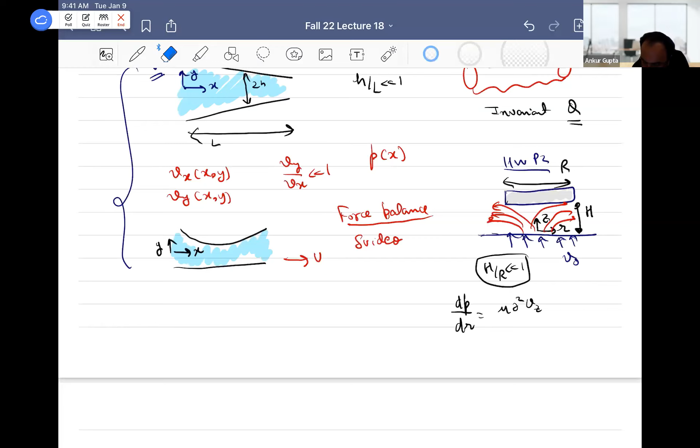the disc. But if there is gravity, how can I use any of the analysis? I have ignored gravity. When I write the formula, let me just write it here. dP by dr is equal to mu del square vr by del z square. Okay, so this is how I will start my lubrication, right?

I'll take the pressure gradient and argue it is only a function of radius. Then mu del square vr by del z square. So it's del z square in the bottom as well. And this is how I'll start. And I'm saying there is gravity because that's what is holding the weight of the disc. But there is no gravity here. Sorry, is it the dynamic pressure?

So the answer is there's a dynamic pressure. So that's a good comment. We haven't discussed dynamic pressure, so please go ahead. Well, we're solving these equations in the fluid, and in this case, the pressure just dominates gravity. Right. Good. Okay. So almost there. So that's exactly the idea.

Note that we argue pressure is in the radial direction, right? Implicit in that is that we have done a z direction balance. If gravity is only in the z direction, the effect of gravity is only going to be in the pressure in the z direction. And because we have already argued that the z dependence is small, we can ignore gravity in the radial direction because there is no gravity in the radial direction.

Now imagine if I flip the system, somehow there was gravity in the primary direction, then I will have to include gravity. It's not that gravity doesn't exist, it's just that in this problem, it is not affecting our pressure. If I flip the system somehow, like an air hockey table with a disc and the flow in this direction with gravity, the gravity is going to impact it. So I just want to clarify that so that you can understand.

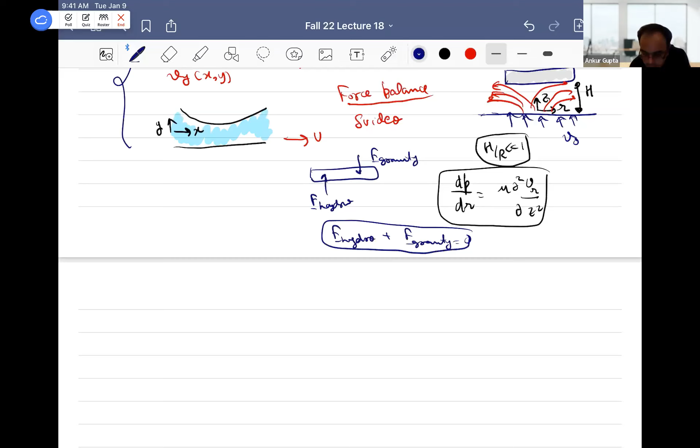So now let's go to the next kind of flow. For unidirectional flows, we learned invariants. And by the way, the invariant in this problem, as you will do in your homework, is naturally going to be V naught. We are basically pushing some air inside the system, so the invariant is not going to be flow rate, but V naught. All right. So first we discussed unidirectional flows. Now let's go to creeping flows.

So creeping flows, the idea was simple. The idea was Reynolds number is much smaller than 1, and hence my equations simply become ... plus rho g is equal to 0. And for practical purposes, we consider gravity-free flows. It can impact it, but we were just ignoring it, assuming systems with gravity equal to 0. But this is our equation. And naturally, we also have this equation. We just ignore the inertia completely because the Reynolds number is small.

And a hidden assumption, which will be true for this course, but just so that you are aware, is that the process time scale is comparable to the viscous time scale. Basically, the Strouhal number is on the order of 1. That's a detail, but just for completeness, I want to emphasize that there is a small assumption there. We'll not worry about that for the purpose of this course. Now, just to briefly recap what we discussed.

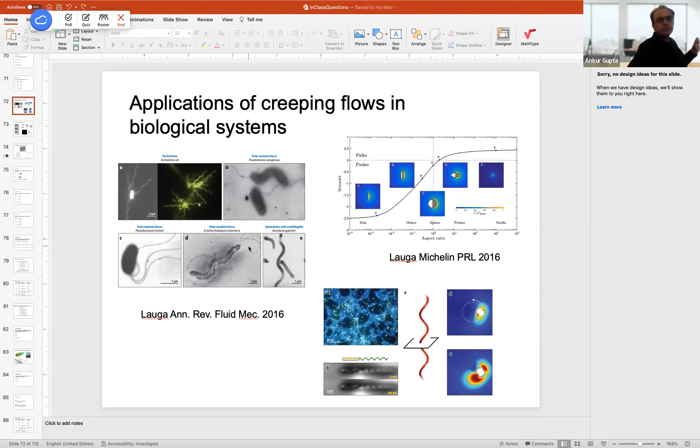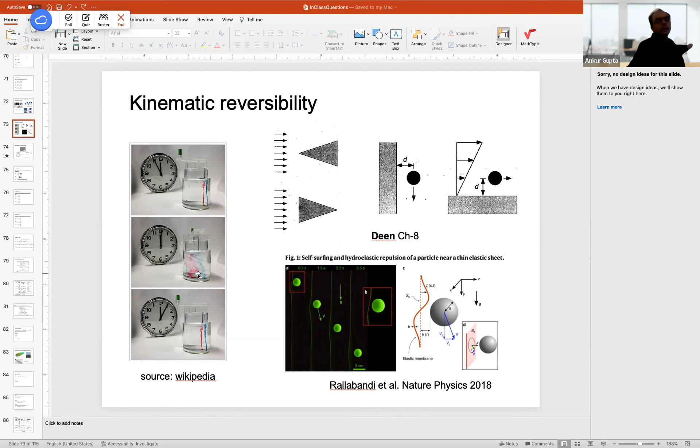The main point I want to emphasize is that these are time-dependent systems. This image that you see is time dependent, right? And my equation does not have any time dependence. So what does that mean? Isn't that weird? I'm talking about all these phenomena which are time dependent, but there is no time dependence in my equation. Yes? Is it because they're position dependent and time plays into position, which is why it's reversible in time? It's a good idea. I think you're almost there.

So Colin's comment is basically that the position has an impact on time. A more formal way to describe it is that the boundary conditions can be a function of time. So don't forget that boundary conditions can be a function of time. So here I want to go back to the problem discussed last week, which is a squeeze flow problem, where we are squeezing out flow between two plates.

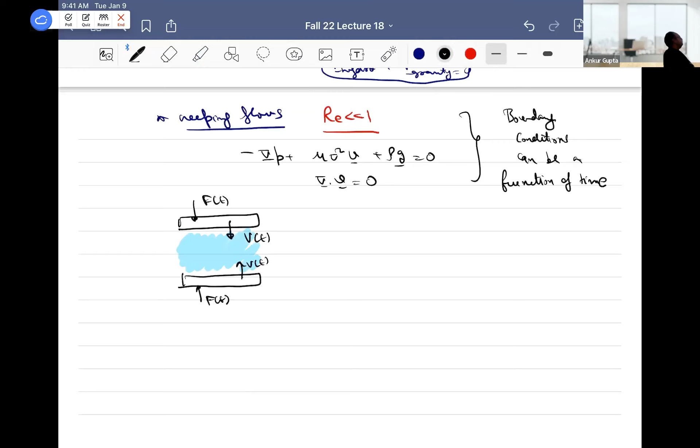So there is some sort of a V(t) here. And so you're applying some force here. And then you're trying to kind of push these plates. Actually, we'll just say V here, let's say. And then this height here, let me just call it 2h(t), just for purposes of this. Felipe did it with small h.

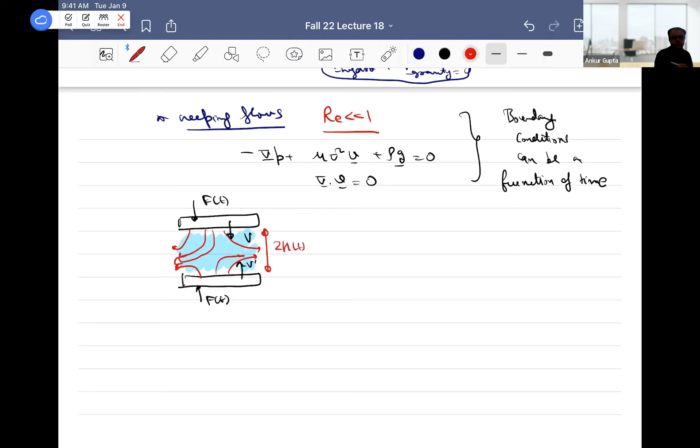And as Felipe had discussed, basically flow will happen kind of like this. You're squeezing out the flow. And the point being that this is R, this is h. We were given that h by R is smaller than 1. So in a way, this is sort of similar to the air hockey problem, right? There is some normal component of the velocity, from both directions. Height is very small compared to the radius.

So what is the difference? The difference is that now there is a time dependence. It's no longer a steady system, it's a time dependent system. So basically it is kind of like a lubrication problem, but with a time dependent boundary condition. And that's why we put it under creeping flows: this is a creeping flow where the boundary conditions can enter through time.

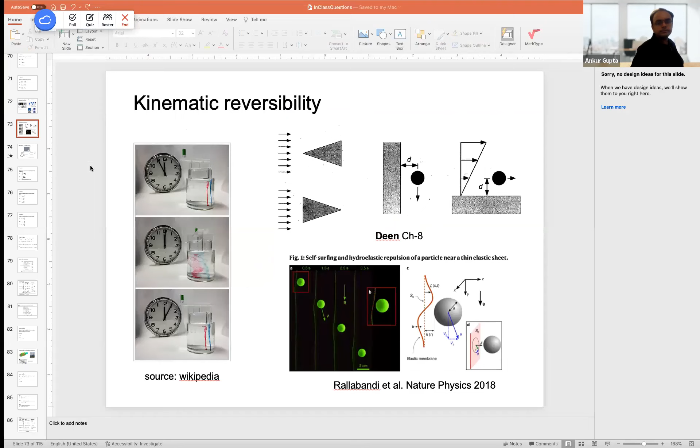We don't say that the system has to be necessarily steady, but when we formally describe lubrication, we assume that the system is steady. So here the system is not steady, it's kind of like pseudo steady. So let's do some quick clicker questions, because this will help you with your homework as well. I want you to think about what is the scale of the pressure here.

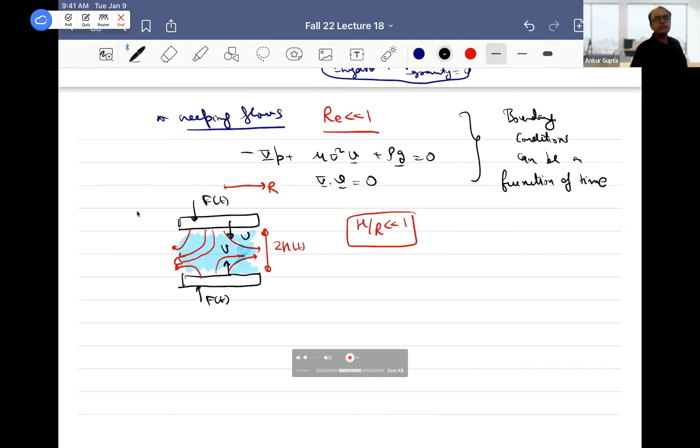And actually, let me correct one thing. Let's call this capital U, from both sides. So what do you think is the scale of the pressure? I just want you to think about the scale of the pressure, how will you estimate it, and what will happen to the pressure.

So I'll give another maybe 45 seconds. Take your time if you need a few more seconds. A hint for those of you thinking where to start is to write the boundary condition and write the governing equation, and once on the governing equation, apply an order of magnitude analysis.

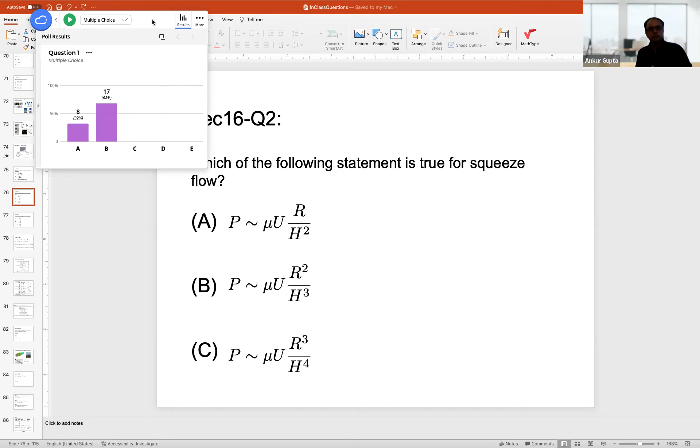All right, maybe last few seconds in case somebody wants to put in their answer. Great. I'll close the poll now. Let's look at the results. So there's a split. I do want you to talk to your neighbor to see what answers you put in, and till then I'll write the solution. Make sure to talk to your neighbors, and we'll start to discuss this.

All right. So the correct answer is B. Let's look at how it is B. Felipe did discuss this. I just want to emphasize again that from the continuity equation, we know V_R by R is U by H. Note that you have been given the normal component of the velocity. So V_R is UR by H. Then when you do scaling here, it's mu V_R by H squared. That's where most students make a mistake: they just substitute V_R as U instead of UR by H. So you get mu U R squared by H cubed.

And now, once you have the pressure, what do you think would be the force? So you've done the pressure scaling. What do you think will be the force? I'll give you about a minute or so. Let's poll this as well. What do you think will be the force for squeeze flow?

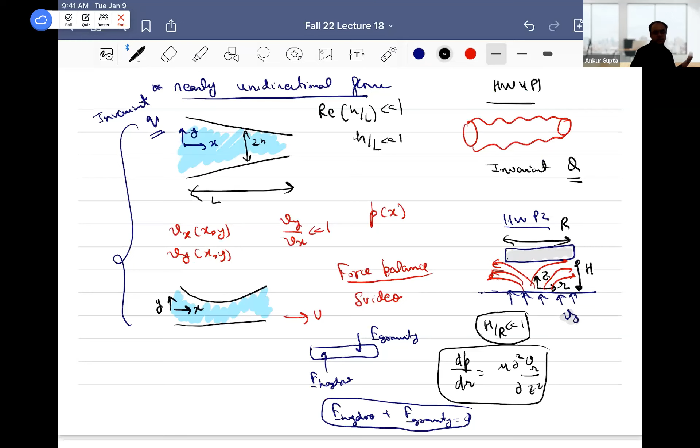Okay, so don't forget that stress vector times area still has to hold, and at the end of the day, you will see that it just ends up becoming pressure only in this problem. So in lubrication flow problems, in symmetric cases, that will happen. When will it not happen? Something like this here, because you're sliding in this direction. There is something that stays unless there is some symmetry. It generally ends up having both kinds of components. So just want to clarify.

Yes, please. So when you're doing the order of magnitude of force, in the end it's an integral of the stress vector, so you just ignore that? Yeah, I've definitely skipped that. Good question. The more correct way to do it is to actually take the normal vector. So it is actually S·n. It'll have two components in the normal direction. One would be tau zz, and the other would be pressure.

This is what you will get actually. And this is much smaller than pressure, which is what you have to show if you want to formally show the full system. But in lubrication flow, in the normal component, pressure generally always dominates, so you don't have to worry about it. Any other questions? Anything that's confusing?

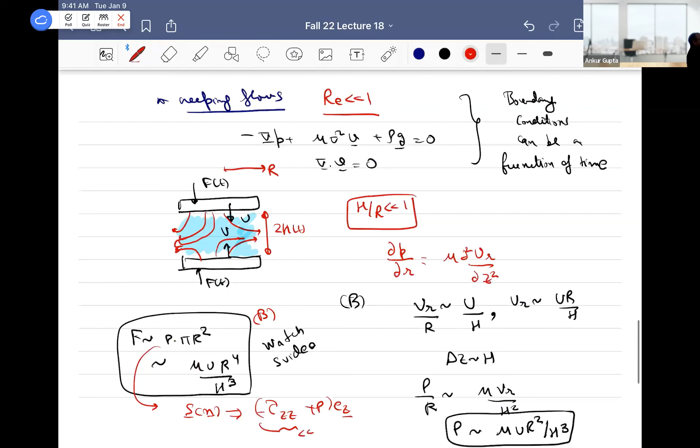All right, so until now we have discussed all the problems where either Vy was 0 or all other components but one were 0 and one was dominant, and then we added the complexity of a dominant flow with a time dependent system. So that's until now. And finally I wanted to discuss creeping flow with two components of velocity. And that's essentially the flow past a sphere.

So flow past a sphere like this. And we ignore the gravity. So ignore gravity in this problem. And then we'll say minus grad P plus mu del squared V is equal to 0. And then del dot V is equal to 0. Now V can have three components, VR, V theta, V phi. This is the sphere of radius R. U infinity e_z.

So this was the problem last time which was discussed, flow past a sphere, and the sphere is a rigid solid. In your homework 4, problem 4, you do a bubble, flow around a bubble, and I'll discuss that in a second. But now you had this, so we ignore V phi. We say there is no flow.

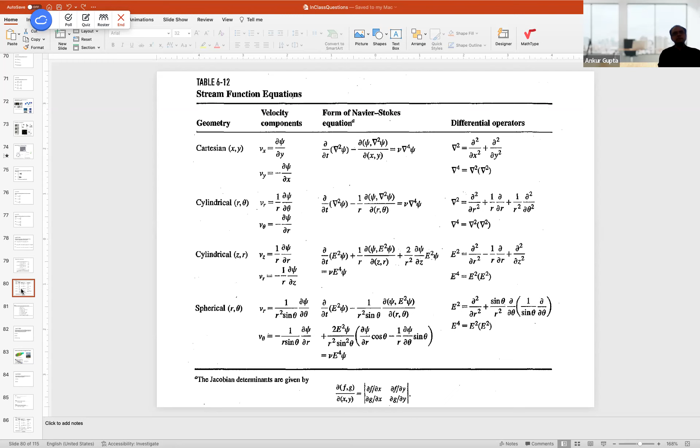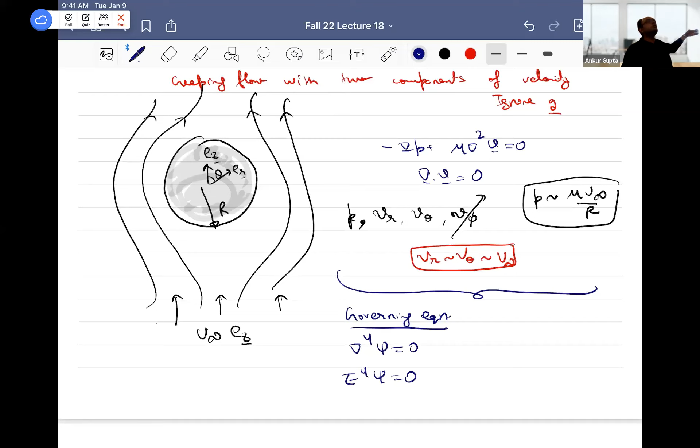But what are my boundary conditions? Are they in psi? Because the variable I'm trying to solve is psi. So how will I find my boundary conditions in the system? Any thoughts? It's a fluid-solid interface, so no slip, no penetration, and then you know the velocity far away. So the boundary conditions, though, are in VR and V theta. Does everybody agree with this?

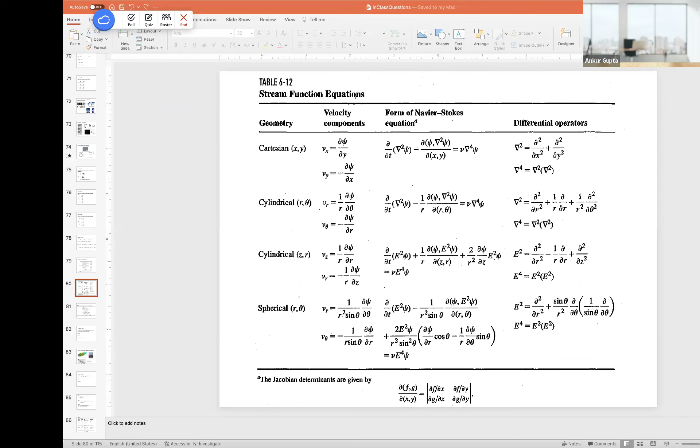Any questions about this? Any questions? So how do I go from VR and V theta to psi? Absolutely. So I really want to make sure that you all follow this process, is that we know the VR and V theta. If I write my boundary conditions in VR and V theta, then I can convert them into psi. Okay, convert them into psi. So you have basically governing equations and then boundary conditions, and you can convert them into psi.

Now, should I be able to just solve the system? I mean, you have governing equations and you have boundary conditions. Should I be able to just directly solve? What do you think is the complication here? Sorry? Yeah, I agree. But I'm saying that there is a fourth order governing equation, and you will have 4 boundary conditions. The complication is this is a PDE. It has dependence on both R and theta, right?

We know that psi is dependent on both R and theta. I cannot do any order of magnitude analysis to say that, oh, well, R is much more dominant, theta is less dominant, and so on. It is dependent on both R and theta. So that's why you convert psi of R comma theta, and I will skip over some of the details. Felipe had already provided this in his lectures, that you can actually argue that it'll become like an f of r times sine square theta, and this comes because of the boundary conditions.

Don't worry about this sort of detail. This will always be given to you in a homework problem or an exam problem, that you can substitute something like this. But I want to go through the process. So governing equations are this, boundary conditions are in VR and V theta. We convert the psi into f of r times sine square theta. Then now you convert both your governing equation and boundary condition into f of r. Okay, into f of r.

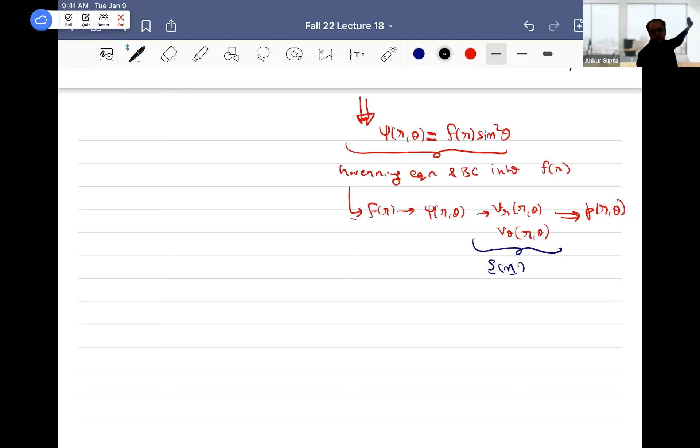Oh, by the way, there's also one last step which we don't do in the class, which is to get pressure of r comma theta. So something you will not do. We'll just give you the pressure, which is an even longer problem. So let's not go over there. But I want to show you the process. Remember this: creeping flow, 2 dimensions, stream function. That's the idea. Then boundary conditions, usual, but convert them into psi. Then convert a PDE into ODE.

Then solve for f of r, go to psi of r theta, VR, V theta, pressure of r theta, and then stress vector. And then from stress vector, you can calculate force. And that actually is the process to get the force as 6 pi mu r u infinity. That is the Stokes drag.

In your homework problem, you will do the exact same process. You will have VR, V theta, del four psi. The only difference being that your boundary condition will no longer be no slip. It will be 0 shear stress, because it's a liquid air interface. And the same process, you do the psi, you get f of r, you get VR, V theta, and then finally calculate F. So you do the same process, but for a different system and a boundary condition. So one boundary condition changes the entire flow calculation.

Okay. Now this result, this seemingly simple result, I would say has probably had the most impact on fluid mechanics, even other fields.

If you have ever used a DLS, dynamic light scattering experiment, you know that you can calculate diffusivity through that experiment, then you use the Stokes drag to calculate the size. It's called the Stokes-Einstein relationship, which basically is in every dynamic light scattering experiment. This relationship is basically used to understand drags of small particles.

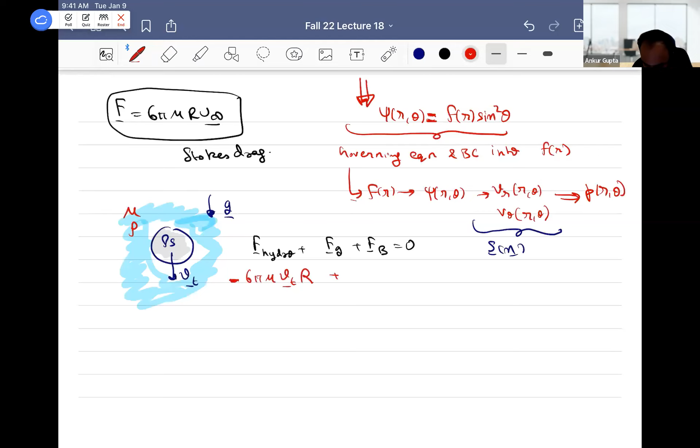So the net force is F hydrodynamic plus F gravity plus F buoyancy equal to 0, and we basically say minus 6 pi mu Vt r, and I will discuss why there's a minus sign, plus 4 pi by 3 rho s g r cube minus 4 pi by 3 rho g r cube equal to 0, and you will be able to derive that Vt is 2 by 9 (rho s minus rho). I believe this should be correct. Hopefully I didn't get anything wrong. And this is your terminal velocity calculation.

Okay, and I'll answer Noah's question. Noah had asked me a question, so I'll answer this question now. But this is essentially the calculation of that hydrodynamic force. First, there's a negative sign. Can anybody tell me why there's a negative sign instead of a positive? Yes. Because it's a force on the ball from the fluid rather than on the fluid from the object. So that is the force on the solid, right? That is also the force on the solid, the Stokes drag.

Right, because the force is when the fluid is moving. In this case, the fluid is at rest. It's the solid which is moving. So you just reverse the sign, because if you sit on the solid, then the velocity is minus Vt. Okay, does it make sense, Colin? It's the relative motion, because in this case the solid is moving and the fluid is at rest. So if I want to make the solid at rest, it's the fluid going in the opposite direction. So that's why there's a negative sign. Any questions? This is very important. Minus sign?

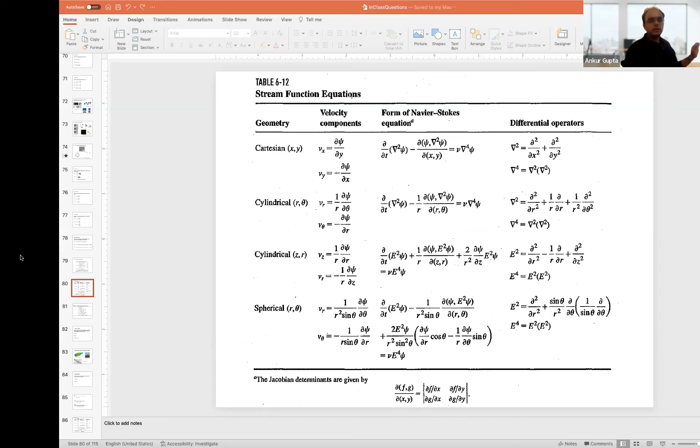One quick question before we take a break: since buoyancy force is the hydrostatic pressure force, aren't we double counting the buoyancy force? This was Noah's question. Since buoyancy force is a hydrostatic pressure force, right? We know that. And I have already done the full force calculation with the stress vector, where we include pressure. So aren't we double counting the buoyancy force?

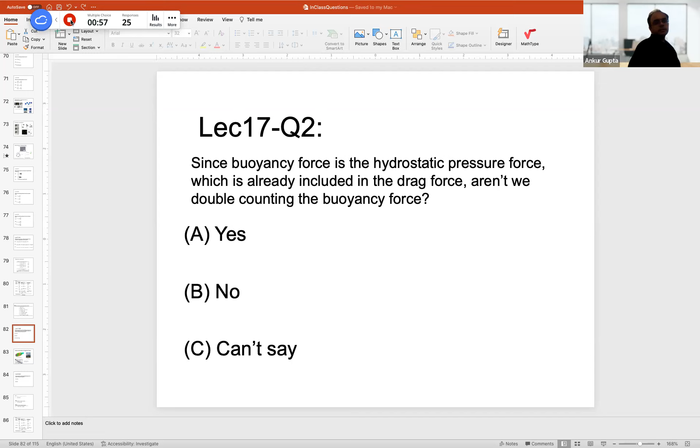Maybe another few seconds. All right. So let's end the question now and let's look at the answers. So most of you say no, which is correct. But I want to give a reason. So why do you think you're not double counting?

Okay, so a good sort of argument is that the drag force which you are calculating is sort of related to movement, and it's not really buoyancy. But then my argument is, well, pressure force is the buoyancy force and I'm including pressure. Then what's the issue here? Any thoughts? So that's where we cheated a little bit.

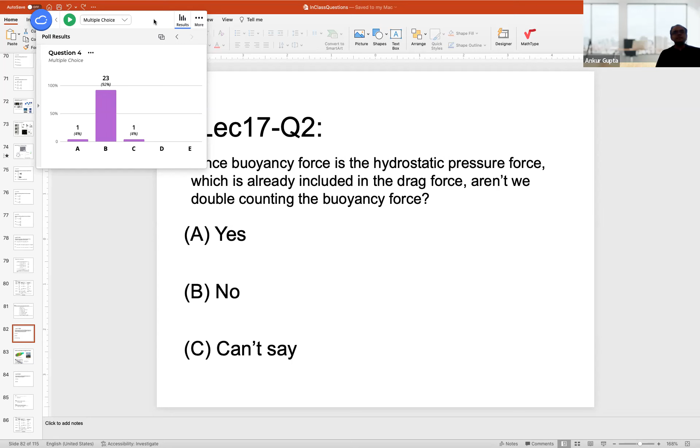So when I said here before that I will give you pressure here, right? We said this at this step. This pressure was calculated by assuming minus grad P plus mu del square V is equal to 0. If this pressure was calculated with a rho g vector, which should be the case, then you would get the buoyancy force automatically. But because creeping flow has superposition, we just know that it will have a buoyancy force

separately, and then we just use that as a drag force. So it's not double counting. It's just in this case, when we are calculating the pressure force, we did not include gravity. So that's why we can basically get away. Does it clarify? If we include gravity here, then you will not need to include buoyancy. It will automatically be included in your pressure forces.

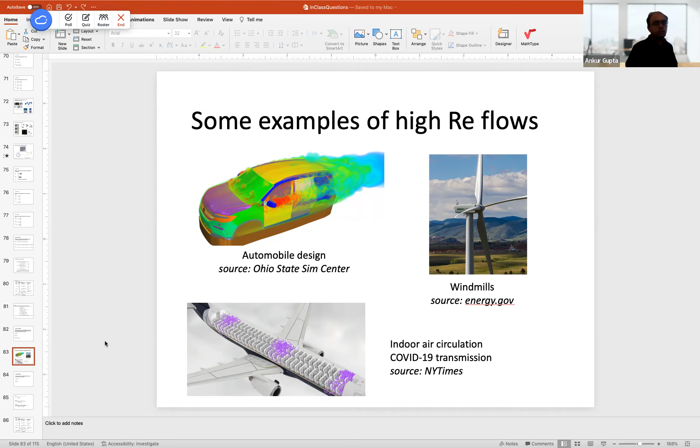Okay, so let's think about some numbers. If you are driving within Boulder, I don't expect you will go much more than 20 miles per hour. So let's say you have an automobile, and your velocity is on the order of 10 meters per second, which is 36 kilometers per hour, about 25 miles per hour. The length of the automobile is on the order of 4 meters. Viscosity of the air is 10 to the minus 5 Pascal seconds, and density is 1 kg per meter cubed.

And the Reynolds number rho u L by mu comes out to be on the order of 4 times 10 to the power 6 with the SI units plugged in. So at a very moderate driving speed, you can get such high Reynolds number. Naturally, we have to think about this very practical limit. Low Reynolds number is an active area of research because of micro scales, but usual life, meters and so on, gives very high Reynolds numbers. So now let's go to our governing equation.